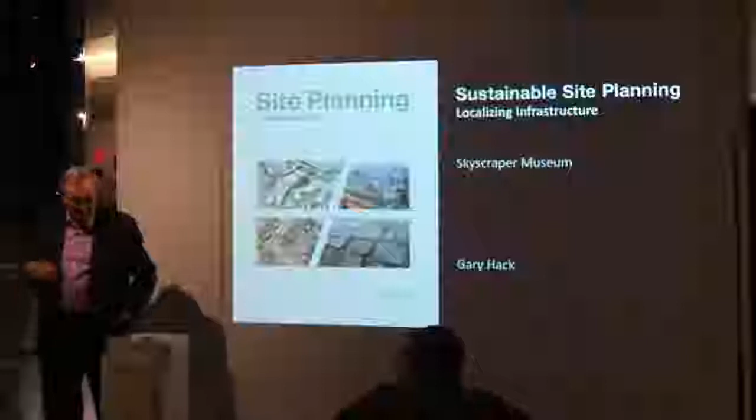I'm always partial to having a small group rather than a large group. I was thinking, as I was sitting there, that when I was a young faculty member at MIT once, I offered a new course scheduled in one of these raked classrooms with seats all up and down. I went there 10 minutes early and waited, and no students appeared. Five minutes after the scheduled time, a faculty colleague wandered in and said, 'My course is scheduled here as well.' So there were two of us, and no takers.

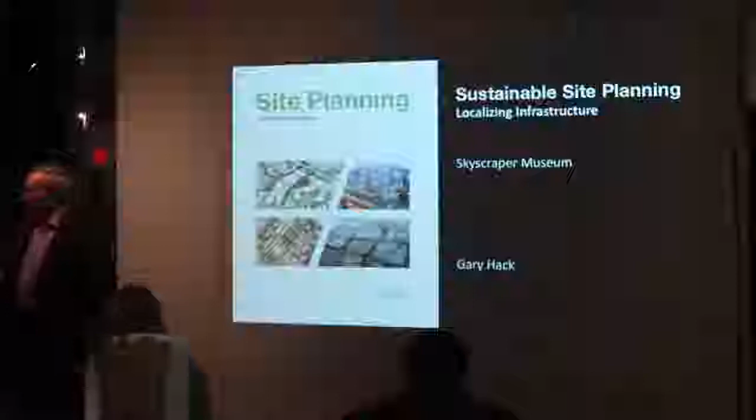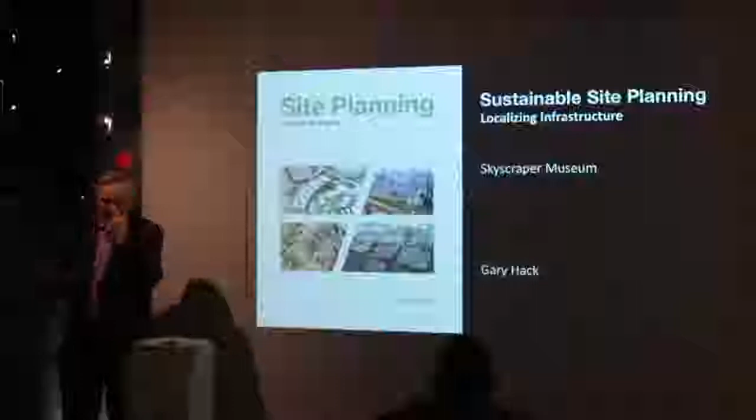In any case, it'll be good to have a discussion here tonight. I'm going to do it with the help of slides. I'm not going to try to summarize everything in the book—there's lots there—but what I want to do is focus on a particular subject I became very interested in while putting the book together. I'll say a bit about the book and its origins and how I thought about putting it together.

But the subject I'm going to come down on is the question of localizing infrastructure. What's happened in the world is that new technologies, new green technologies, have emerged that allow things that in the past relied on large public systems—like water systems, sewer systems, and other such things—to be done locally. That changes the whole ballgame, for development and for creating new kinds of opportunities. So I'm going to focus on that as the main topic.

But let me begin with a few things. The idea of writing textbooks about site planning goes way back, at least a century ago—these were the first textbooks done on site planning. Charles Mulford Robinson, the first professor of civic design in the United States at the University of Illinois, wrote a book called The Width and Arrangement of Streets, A Study in Planning, in which he cataloged what it took to plan streets. Longstreth Thompson did the first book called Site Planning in Practice in 1923.

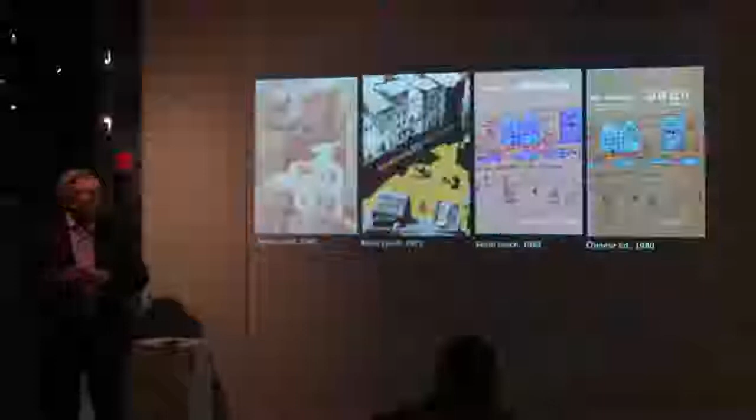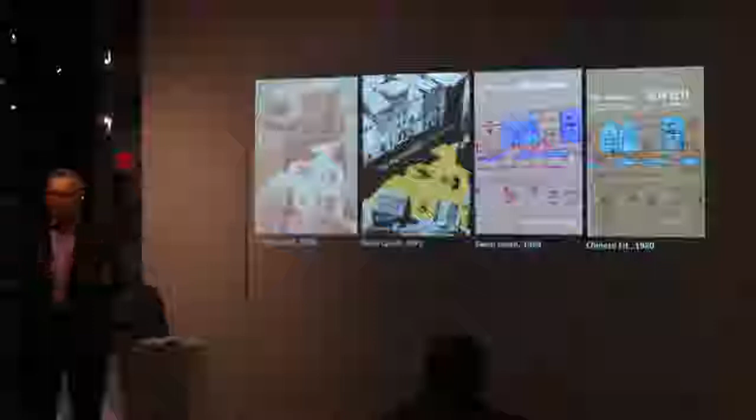My late colleague Kevin Lynch wrote a version of site planning, pulling together notes from his teaching, notes from engineer friends who helped on engineering aspects, and ideas from Hideo Sasaki, a landscape architect teaching a similar course. He published the first book we now think of as site planning in 1960, with a new edition in '71. In 1984, I joined him and we did an expanded, rewritten edition. That book has been in print and used to this day.

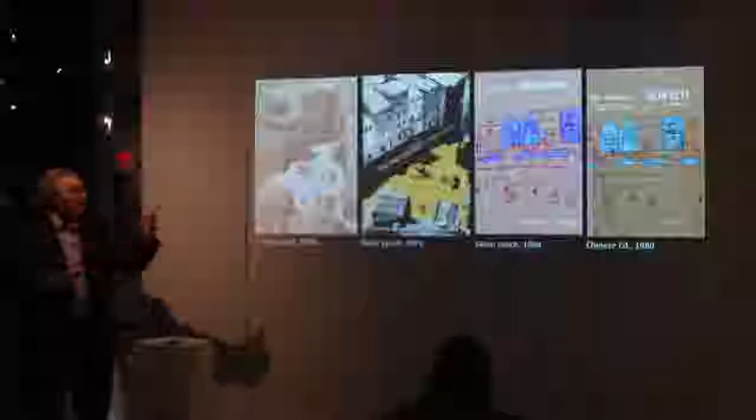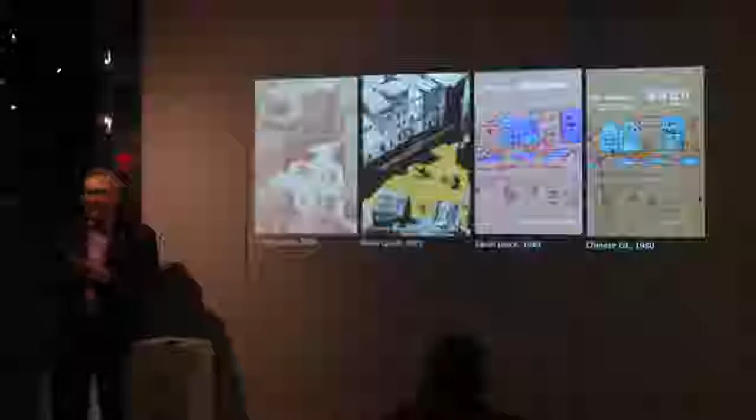It's way out of date—I wouldn't use it myself—but people do, and it's still going. On the right is a Chinese edition of the book. There are actually six Chinese editions, at least that I've counted—two were authorized, four were not. Whenever I go to China, somebody brings up one of these books and asks me to sign it, and I'm always curious which edition they're actually using.

So I begin with the premise that cities are built site by site. Planning is really important—I'm a planner, I've spent quite a bit of my life doing that—but actually the real decisions are made site by site in the city. Sometimes they're very large sites in which you create a context for individual buildings, but often they're small sites. The opportunities realized are as much a product of how creatively people approach individual sites as of any plans or grand schemes that local government or others have created.

So what makes for a great site? It's sustainable to start with. It's efficient—I'll talk a bit about what I mean by that. It's responsive to humans. It's economic—sites are there principally as instruments to make money for the people who own them, or to deploy resources well, as in the case of institutions, so they're not wasting money on things they could otherwise be more economical about.

Good sites are compatible with their surroundings, and good sites are adaptable over time. In fact, it seems to me that one of the important responsibilities of a person doing site planning is to think about what the next generation of use of that site will be, and to structure it in ways that allow a transition to new uses 5, 10, 20, 25 years afterwards.

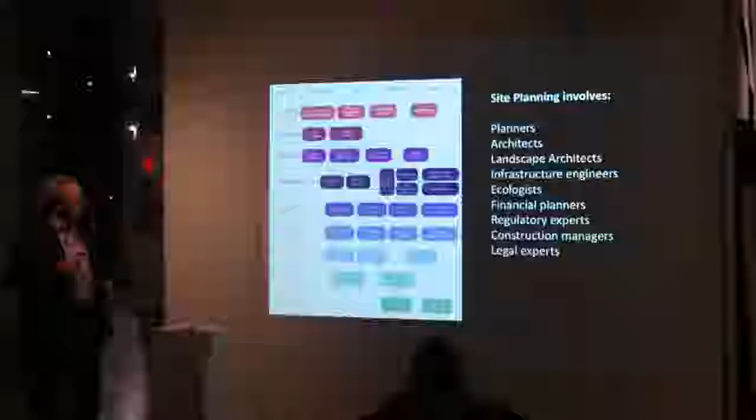Now, there are a lot of activities. Some of these are familiar to you in your various professional roles, ranging from site analysis to programming to site design to engineering, landscape architecture, landscape design, financial planning, etc. Remarkably, this is a field that is not occupied by one profession. It's occupied by several professions.

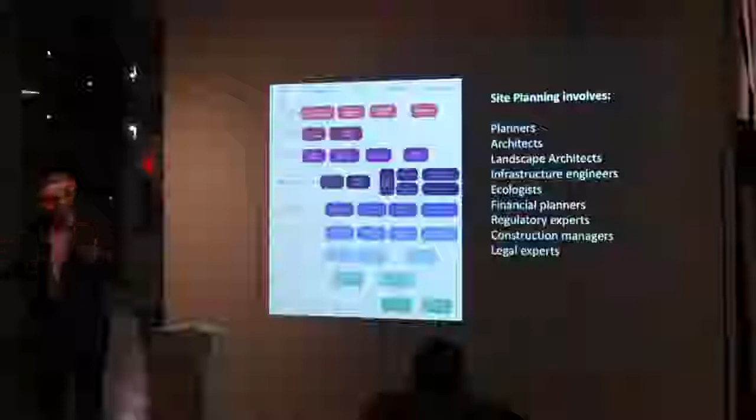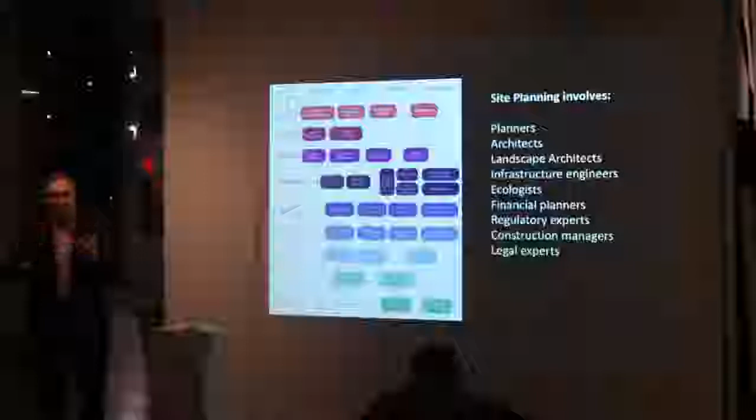The architecture exam for licensing architects has an examination on site planning. The landscape architecture exam has a whole section of its examination on site planning. The planning exam, which I helped write, partly because I pushed this, has a whole section on site planning as part of that kind of stuff. So this is really a shared endeavor of a number of professions, and it has to be thought of as one where professions pool their skills, resources, and knowledge in order to make decent decisions about how a site should be developed.

In organizing the book, I decided to do something quite different from what I had done before. What I realized was that things change very quickly in some fields and not at all in others. In the past, we had written fairly long chapters, and when things became obsolete, you had to rewrite the whole book. I think 10 or 15 years from now, most publications are going to be digital, and in fact there are 2 digital editions of this already available now.

With digital editions, it allows you to actually revise pieces of it whenever you want. Three years from now, when new developments occur in a particular field, you can rewrite that chapter. So what I have in the book is 40 chapters, each of which is a discrete subject, and each of which is the state of knowledge today, intended to be updated as knowledge evolves in these fields.

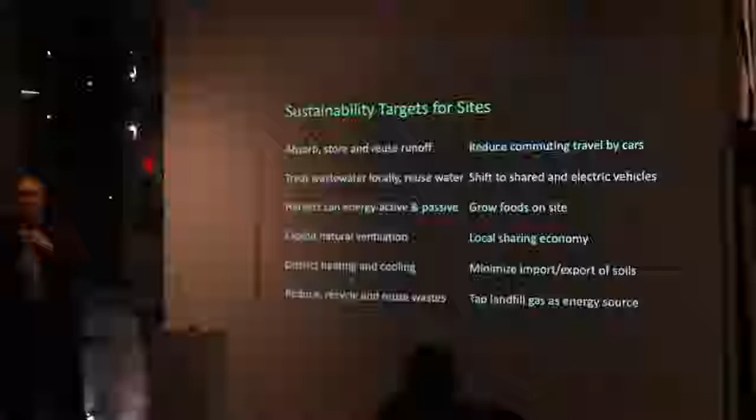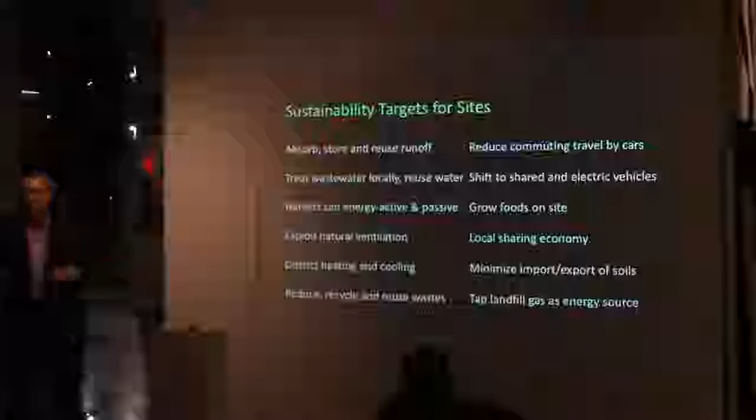So what do I mean by sustainability? I'm going to focus on that. In terms of sites, these are the kinds of things that are usually included in the business of making sustainable sites: absorbing and reusing runoff, reducing commuting travel by cars, treating wastewater locally, reusing water, shifting to shared and electric vehicles, etc. You see the list across here. There are many more things to be done, but if one can optimize all of these kinds of things on a site, then in fact the result is a much more sustainable site.

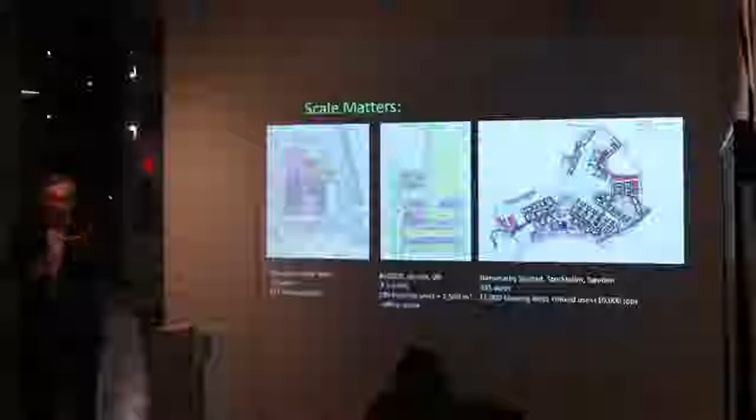Scale also matters, and what you can do depends a lot on the scale of the land that you're dealing with. I told Carol that she deals with skyscrapers and I deal with ground scrapers, both literally and figuratively. When you're scraping a lot of ground, you have many potentials that you can bring into play. When you're scraping very little ground, then you're dealing with vertical infrastructure on it.

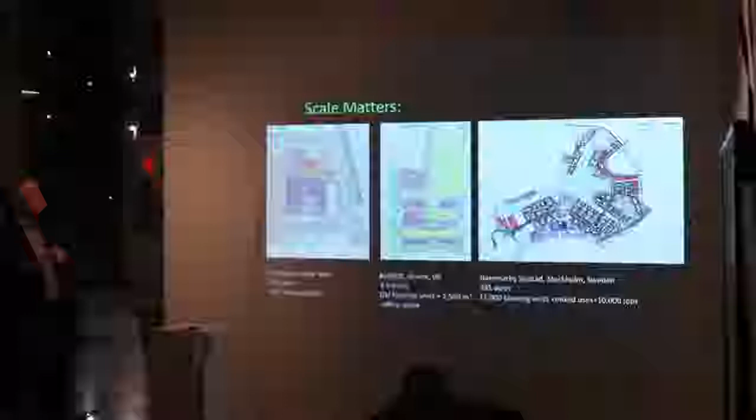So here are 3 examples. The first is a block from here, the Visionaire site. It's 7/10 of an acre in size. It has 250 housing units, and on the ground floor has the maintenance facilities for Battery Park City Parks. It has a supermarket, lobbies, and a few other kinds of things on the ground floor.

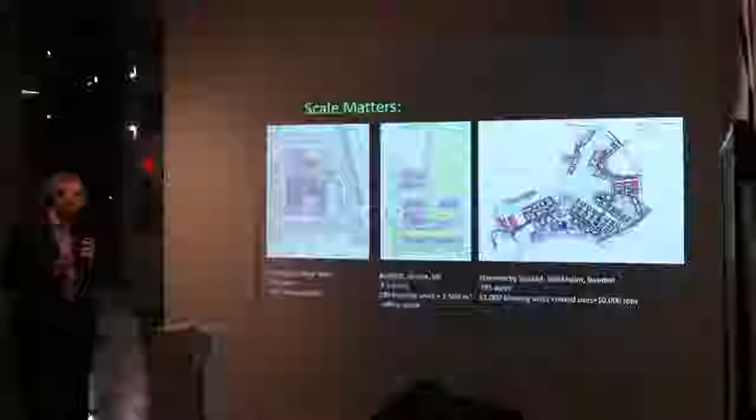Second example is a place called BedZED, which is in Sutton, just outside of London. It's a very innovative housing project on 3.5 acres, 100 housing units plus 2,500 square meters of workspace. It's a live-work community that's been created. Now that's something you can do at that scale when you have enough room to spread out and do it.

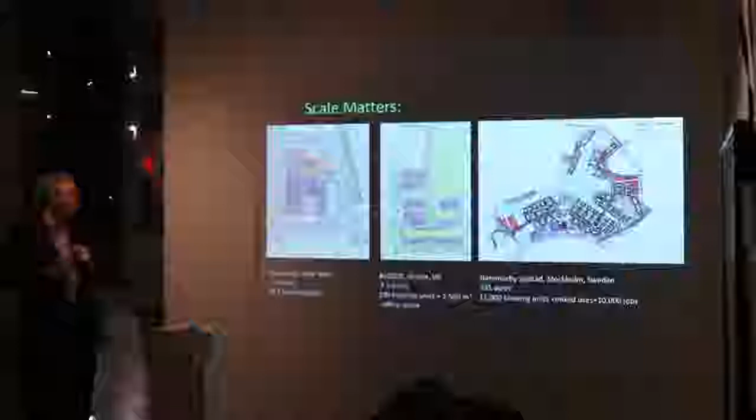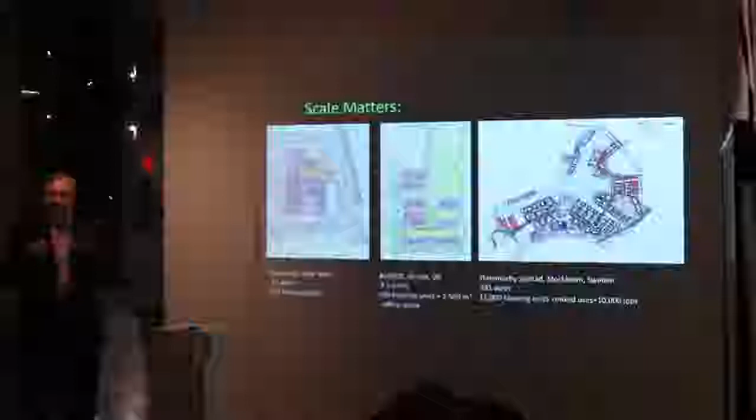The third is a much larger development, in Stockholm, Sweden, Hammarby Sjöstad. I think the best new community development in the world. It's been done over the last 10 or 15 years, planned by the city of Stockholm, developed by many design architects and designers. It has about 11,000 housing units and over 10,000 jobs, all integrated within that development.

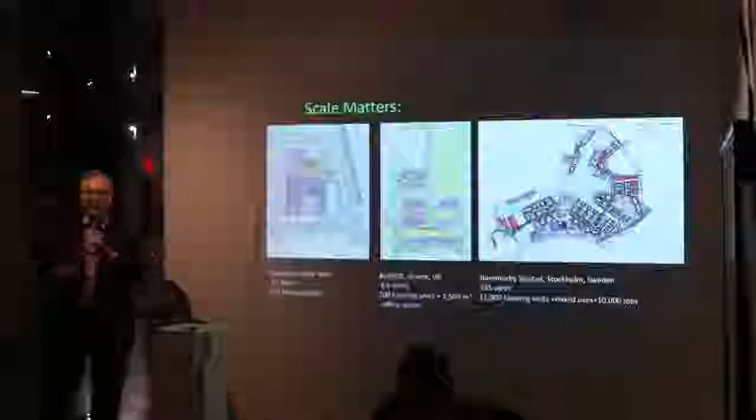Let me say a little bit about each of these. In the Visionaire project, this was a real push on the part of the developers and architects who did this project. Not only did they do things like harvesting sunlight and creating energy from it, but one of the really innovative things is they actually created a sewage treatment plant right on site. So that piece actually functions within that vertical infrastructure they have. Water from toilets and all the other domestic uses goes into it.

It's treated, the sludge is taken and hauled to the sewage treatment plant. The water is either recycled for gray water in the building or treated again in order to make it good enough for potable uses, although they haven't been using it that way.

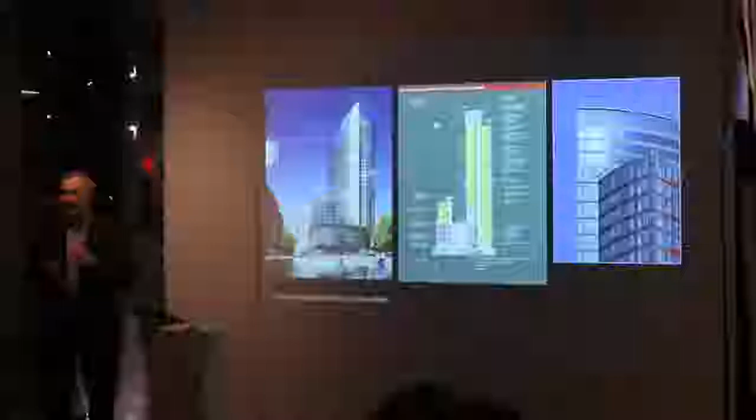They don't advertise it when they're renting the building. But there's an interesting case here: a localizing of some infrastructure that would otherwise have occurred at the scale of a piece of the city, or at least large public systems would be the way you went about that.

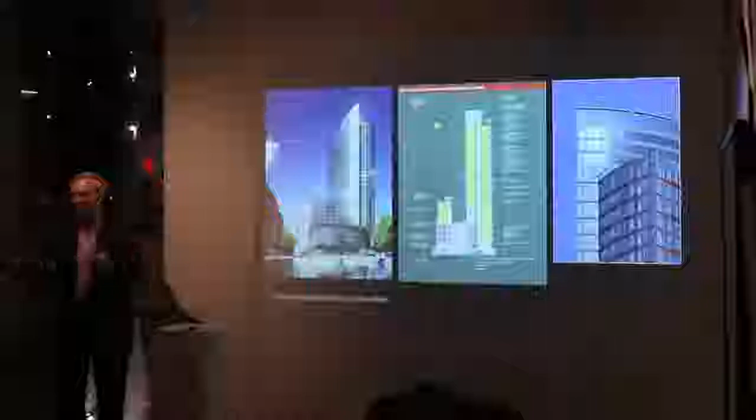It also captures and stores all rainwater on site, uses it for irrigation of their rooftop garden and elsewhere. One dilemma that poses, which is interesting to me, is that they're paying for the city sewers at the same time they're localizing that job in the building. There's been a long dispute about whether they should get credit for not using those public systems. What's clear is that when you begin to localize, you have to think about how you give people adequate credit for the investments they're making in these elements.

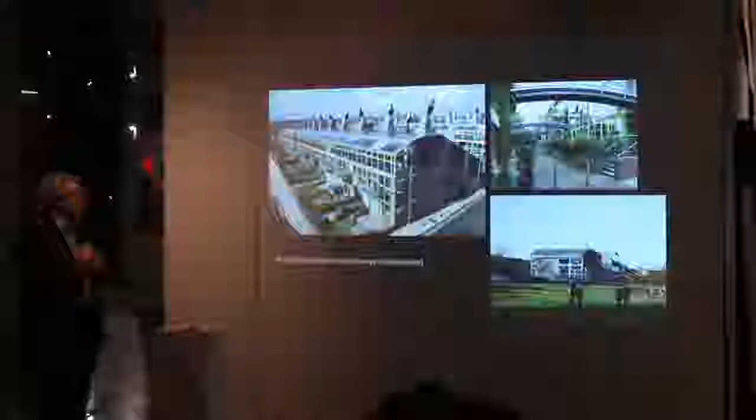Here is the BedZED project, a kind of remarkable project. It looks crazy when you see it, but its major objective was to have zero net energy used in this project. That is to say, they are not adding to external energy requirements, nor putting any additional carbon into the atmosphere as a result of the development. So how do they do it?

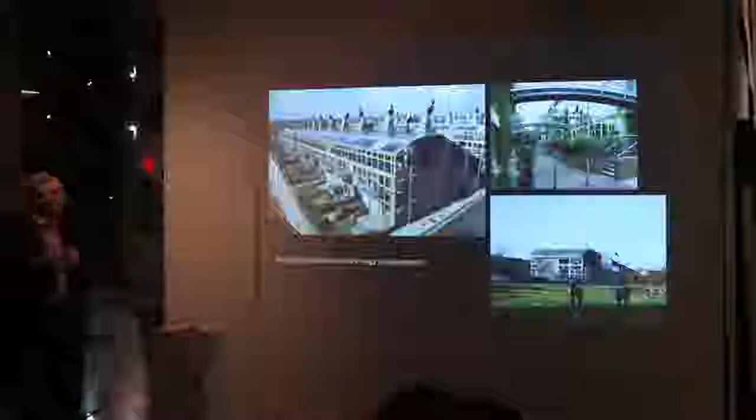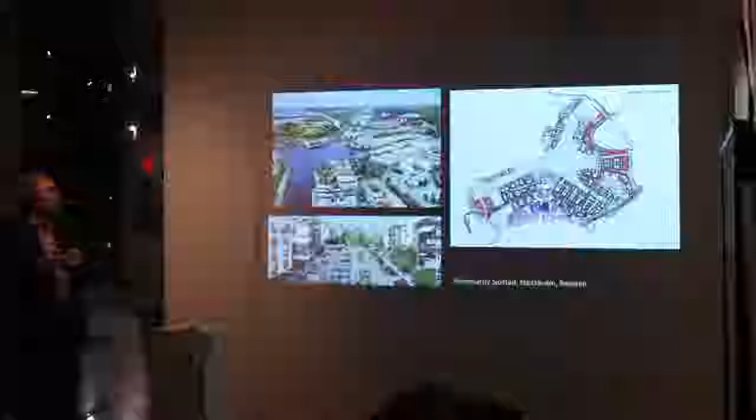Well, one way is that they orient the building so that they get passive sunlight for a good deal of the heating demand. They have solar panels used to generate electricity, mainly for charging the electric cars, which are the only vehicles allowed on the site.

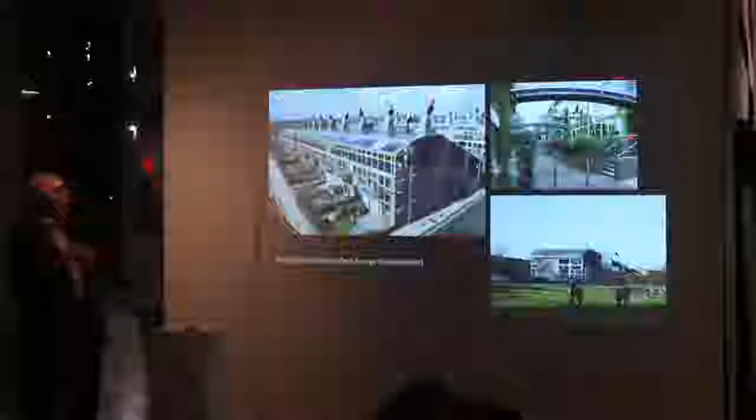They have a live-work arrangement where buildings, behind this one for example, there's a work building connected directly to the apartments and houses on the other side. Out of the 100 housing units, there are 50 live-work spaces, so up to half the units can actually live and work in the same place. They also created a micro-utility, which is this piece here.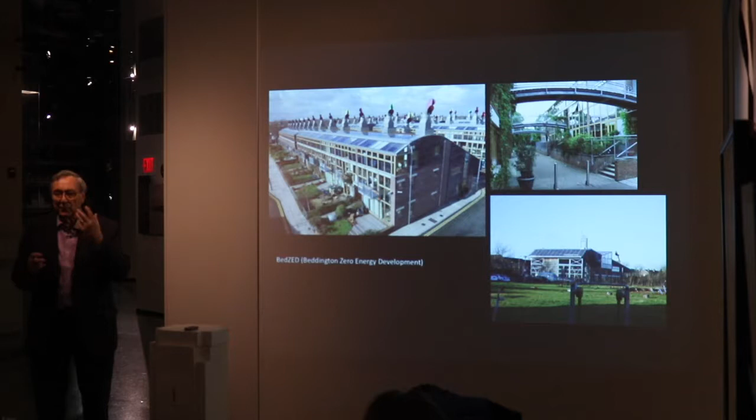The micro-utility creates all the heating for the site—they don't have cooling—and in the course of doing that, generates electricity as well through a wood chip burning system. They use wood from a wood lot purchased nearby, cut the wood, bring it in, burn it, and it's a renewable source since the wood lot constantly builds new energy. They also use solar panels and other ways to supplement that energy.

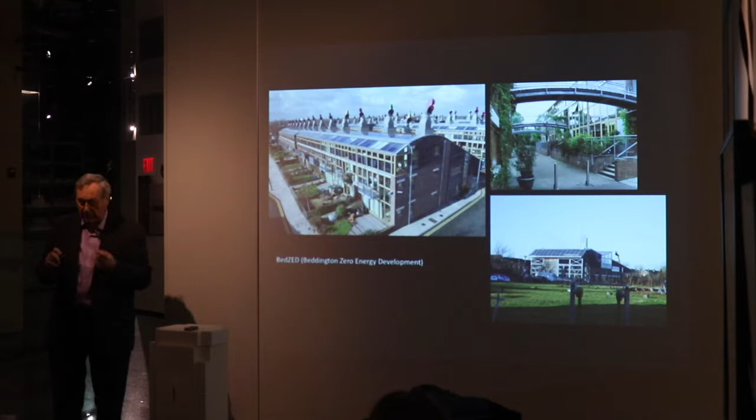At that scale you can talk about micro-utilities, which can in fact serve more than one area. I won't go through these systems in detail, but they're carefully worked out. They also treat all the sewage and reuse all of it as greywater—these are some of the treatment facilities they use, and they have larger ones as well. As I said, electric cars and so on, and this is the system they use for generating the electricity.

Now, at a much larger scale, such as Hammarby, you can do a lot more. This is a kind of wonderful development—you can see the form of it. It's mostly low-rise units, a complete mixed-use development with all the institutions and commercial uses that are needed.

It was built at the same time that a light rail system was connected to take people to the mass transit system in Stockholm, so people could avoid actually buying or using a car. They have wonderful mass transit throughout this thing.

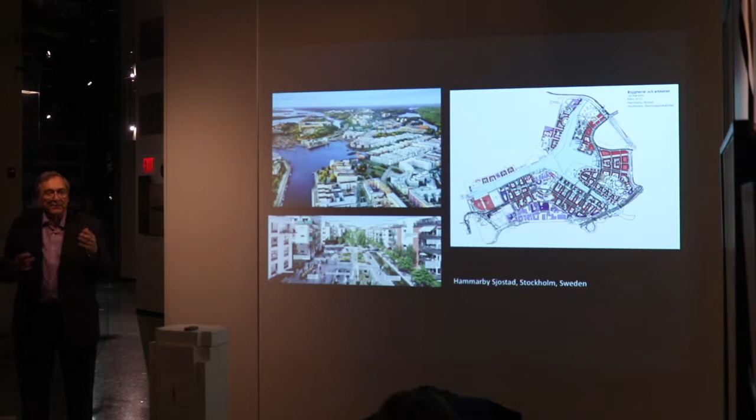They treat all runoff on the site. They have, and I'll show in a moment, a vacuum garbage collection system and recycle all the materials they collect through it. So now we have something that begins to resemble a kind of independent operating entity that doesn't need ties to the big systems, except transit ultimately, and a few other things like that.

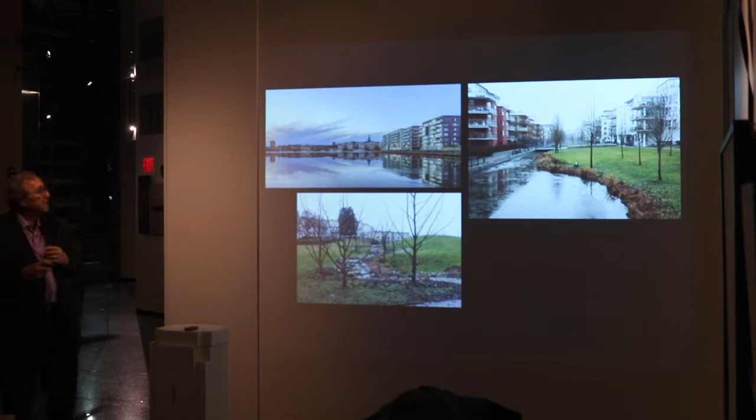All of the runoff, as you can see here, is treated and reused. This was a brownfield site, and there were a number of, they harvest methane gas from the brownfield, using it for fueling the district heating system on the site. The idea they have is of closed loops: three kinds—one on energy, one on water, and one on waste.

In each case, every piece of material that arrives in a building gets recycled, reused, and advantages the development in terms of either energy it's creating, sales of those items, or other kinds of things. Similarly with water, similarly with the energy sector.

Their mass transit is the main way that one gets around. There isn't really a need to have a car. Wonderfully innovative transit stations which have buses as well as light rail vehicles going through them.

These are two dimensions of the vacuum garbage system. Roosevelt Island has a vacuum garbage system which was done in 1975. It was one of the earliest ones in the world, and is now kind of obsolete.

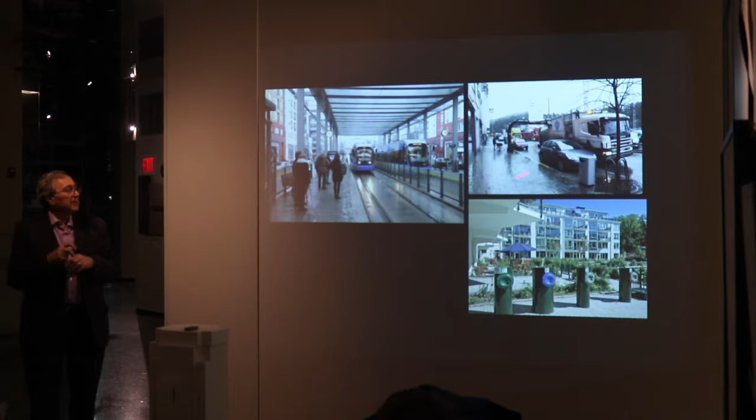What these do is they allow you to segregate the uses at the source, and then either by suction, pulling them out of areas in the ground where things are stored, or through direct suction from the individual buildings, take it to the transfer station, at which point these things are separated. Some become energy, some become compost, some become recyclable products.

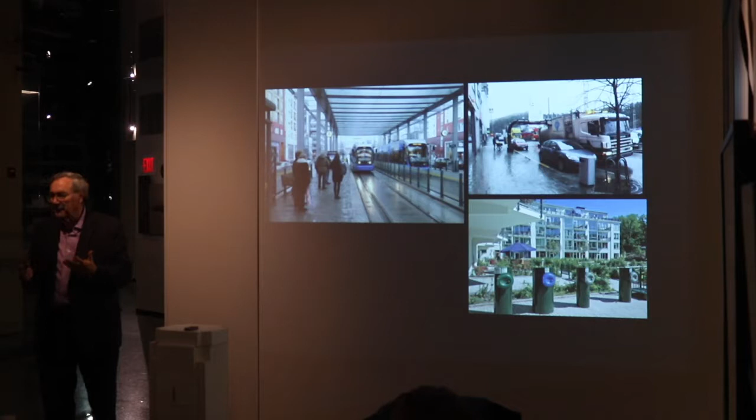And in fact, it's interesting. I looked for American examples of this, and there is no example in the United States that's begun to try to press infrastructure to this extent and try to be as innovative as they have been there.

So let's look at some smaller examples of interesting infrastructure, localized infrastructure. This happens to be in Vancouver, British Columbia. It's a curious little building that sits underneath an expressway.

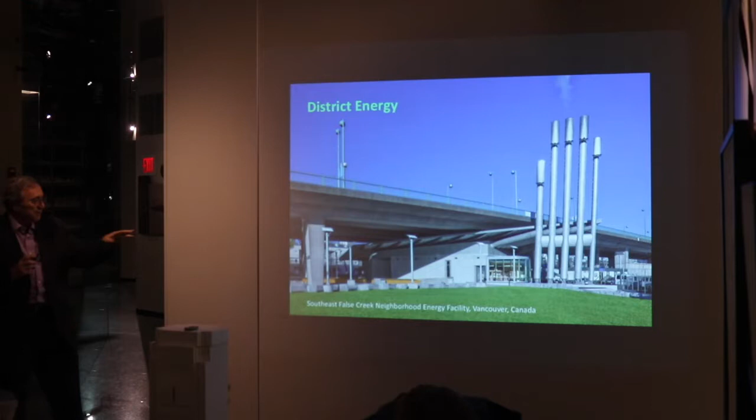It's a district heating plant that's been built for the Southeast False Creek area, which began as part of it, began as the Olympic Village. And so this provides all of the heat and cooling that's necessary for several thousand apartment buildings now, plus other kinds of uses.

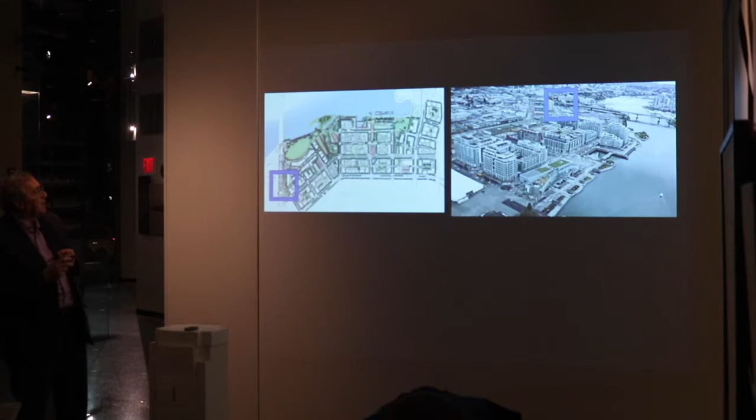So how do they do it? Well, first of all, it's located, as you can see, at the edge of the development. This is a sketch of or an aerial of some of that housing in the area. This is the area that it serves. It's a pretty large area.

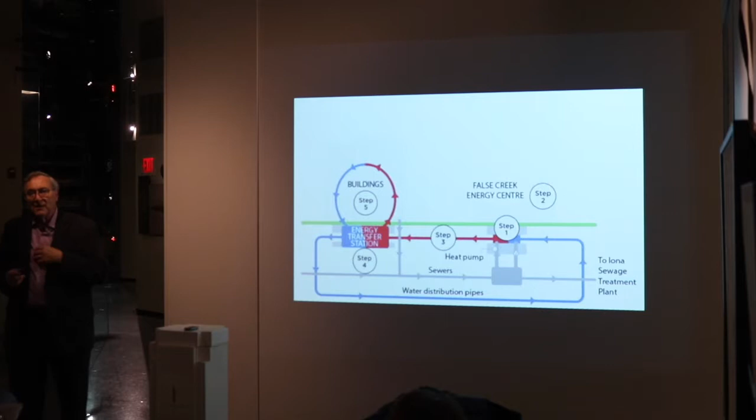So how do they do it? What they do is they harvest the heat from the sewer system. With heat pumps, they harvest the temperature differential in the sewage system from the outdoor temperature. So when you go and have a shower, somebody has paid energy to heat that water up to something tolerable to you, it goes down the drain and disappears forever, all that energy.

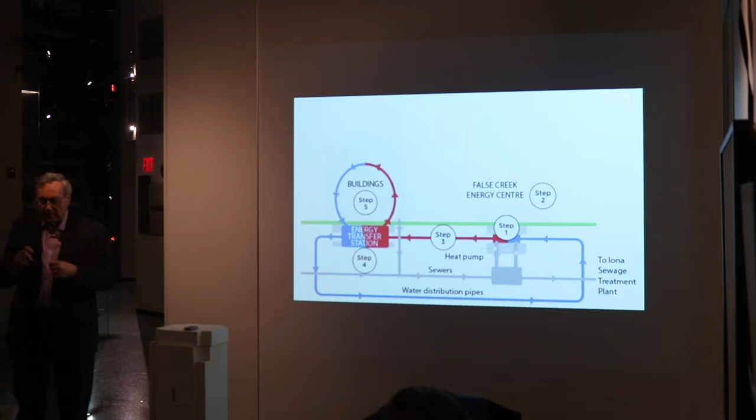So what they're doing is actually taking the 70 degree or 72 degree water and absorbing the energy that's in it in order to heat the buildings, and they pipe it back into the buildings, or in order to cool the buildings in the summer. Literally, the entire heating demand is picked up by this. They do have a backup natural gas system because they're not sure if they're going to be able to do it completely. But in fact, it seems to me this is a localization of a really important little system.

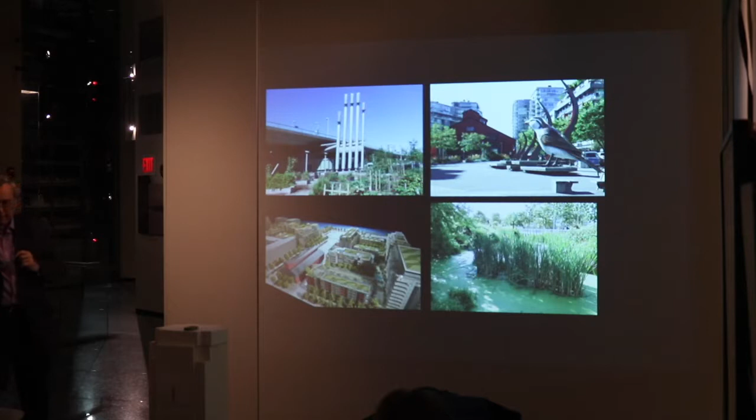There it sits, and there's the housing that's there. This is, of course, when you don't need mechanical penthouses on buildings, then you can really use the roofs for active uses, and they have done so there. And they've also treated all of their storm runoff in natural areas that are on the site. This one happened to have an extraordinary amount of algae in it when I was there, so this is not trivial in terms of how you manage these kinds of natural systems.

Second example, this is a wonderful example from the Netherlands. This is a development which has about 600 housing units in it, which was planned by a group of people, many of whom were at the Technical University of Delft. They decided what they wanted to do is create a sustainable community, and they planned it. Many of them moved in and lived there, and a number of others joined in, and it's continuing to expand, so it got much larger.

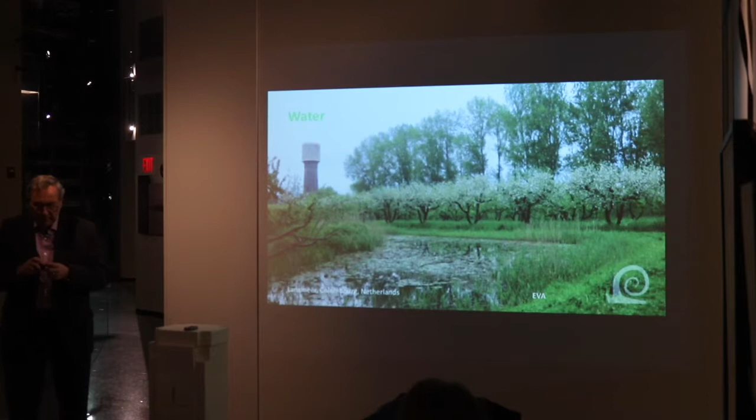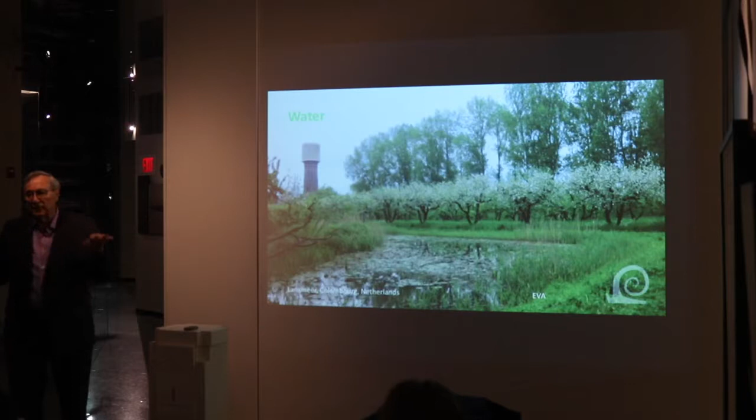So the site for this was a curious site. It was the city's water tank and all of the wells that provided drinking water for the city. So what they did was they decided to keep all that in place and to use that for heating, much as they did in the Vancouver example that I showed you, and also to make water the kind of central theme of their community.

So this is the layout of it. It's wonderful, it's called Lanxmeer. It's a couple of railway stations from Utrecht, and the houses range from clusters.

Clusters like these, each with its own distinctive character, in which people manage the common space collectively. No cars are allowed in the development. You park your car out at the edge and walk from there. The railway station is over here, so if you're living here, you can walk as easily to the railway station and take it to other places.

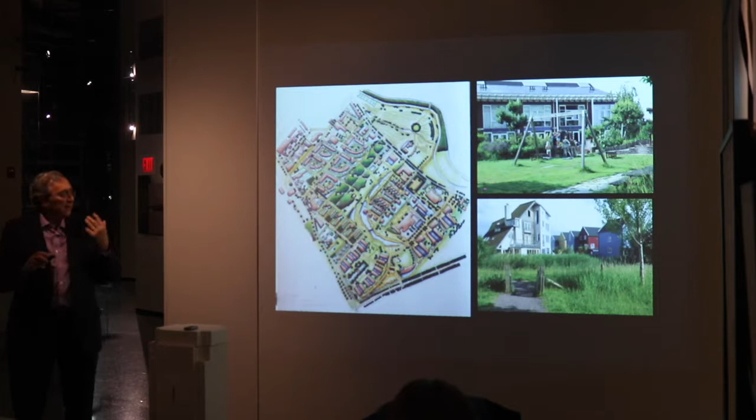There are also lots of wonderfully curious individual houses, and this happens to be a Montessori school they've created. But the whole thing that draws it together is essentially water, and that water begins with harvesting rainwater, storing it in cisterns, using it, then discharging it into wetlands areas.

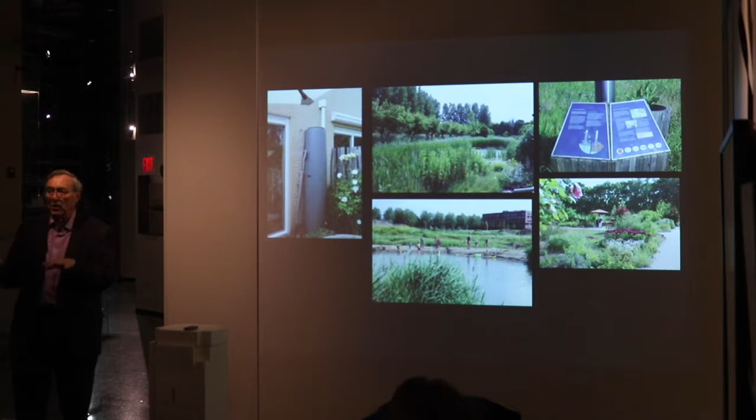Wetlands that are also used to irrigate orchards and grow food as part of the community. Ultimately, it's actually improved to drinking water quality, and this little beach they've created is that same water that came from both the sewage of the community and the runoff going through it.

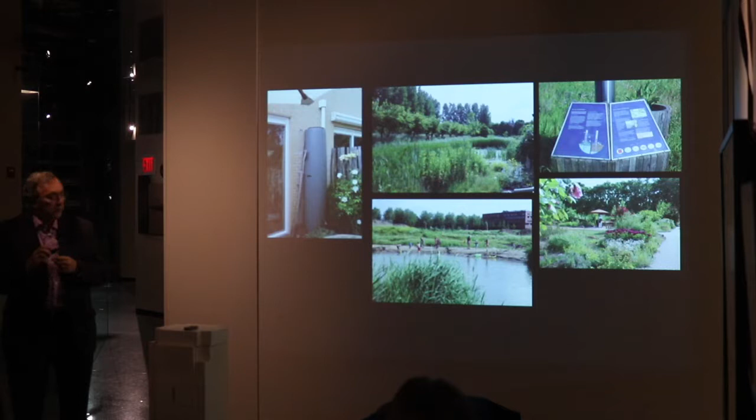Here's a third example. This one actually surprised me quite a lot. There is a project in Portland, Oregon called Hassalo on 8th, and it consists of a 4-block area in which they treat all the sewage out on the street.

You might think examples like the Dutch one I showed are only applicable to low-density areas. Well, this is a pretty high-density area. These are the 4 blocks that it's treated. The street in between, you can see, is this one, and all of the water...

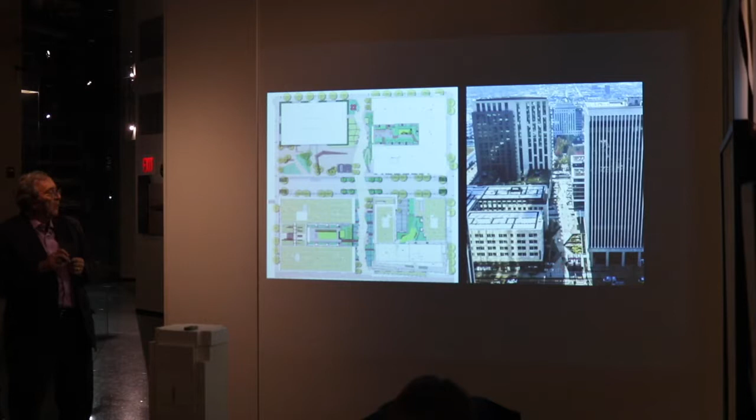A couple of them are residential sites, a couple are office sites. All of the water is treated both by flowing through a series of treatment cells out in the open, and also through purification devices, including some filtration devices over here.

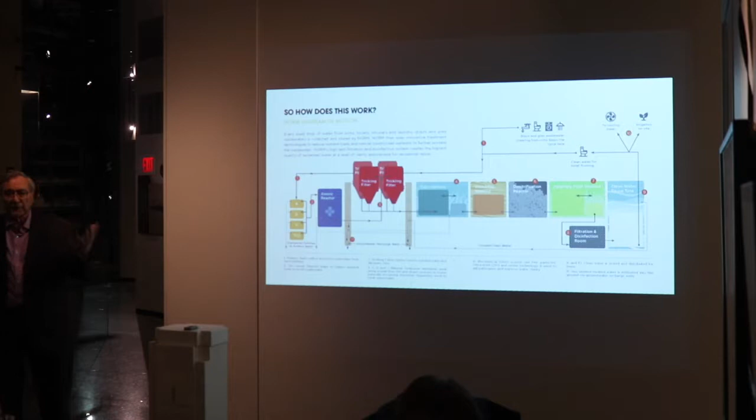So how does that work? I won't go into detail, but basically you have to filter water to get the big impurities out, take the sludge and dispose of it in other ways. Then there's a series of cells in the street that the water moves through, at the end of which it's disinfected and good quality enough to use for irrigating that area, for gray water, toilets, and other uses within the buildings—all in a dense urban environment.

There are also going to be many more local mobility systems: cars you can rent by the hour to move around urban areas, or go from a transit station to a more remote place, or if you're carrying something. Scooters, motorized scooters, already taking over the streets in Baltimore and other places. There are bicycles too—not only ones moored to rental stands, but free bicycles you can leave anywhere, and cars you can rent and leave anywhere.

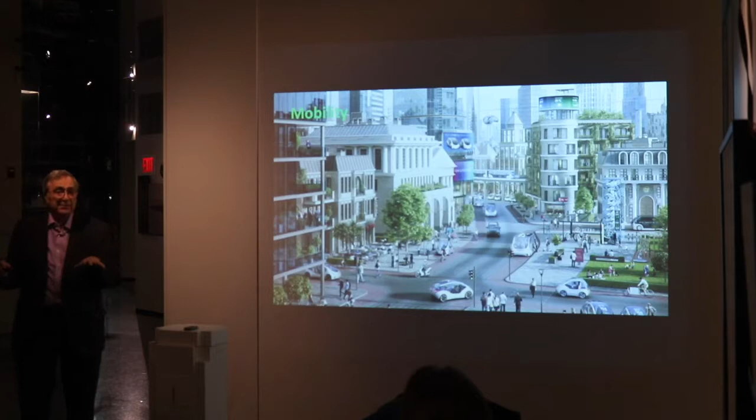All of this suggests there's a kind of local planning that needs to get done around mobility. I say local because when you look at the distribution of trips in most cities, most trips are local—short, from one nearby place to another. Solving that kind of mobility problem is going to become a major driver.

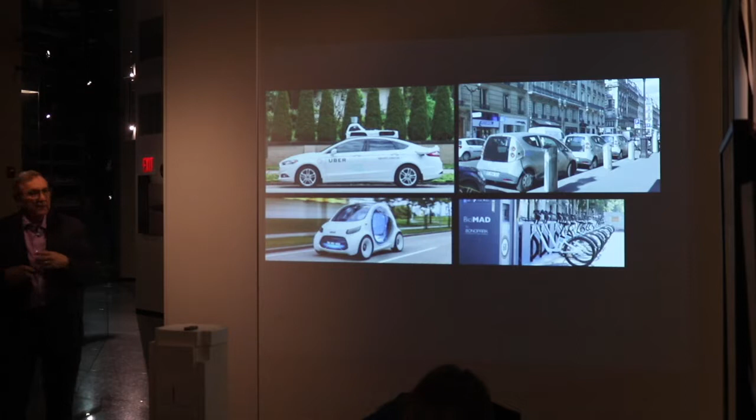So what do we have? We have all of these kinds of things in Paris already—electric rental cars. It seems clear that a large fraction of the population doesn't want to buy automobiles, they want to rent them, use them when needed. Mobility on demand, as in the case of Uber. But all of these things as well, and I don't think we're prepared for this in terms of our streets and the way people use our urban areas.

A few people have done some thinking about this, and the downside is that we could actually be overwhelmed by the number of vehicles crowding their way onto city streets with no discernible order for them. This will also have a big impact on parking.

My colleague at MIT, Carlo Ratti, thinks that you could reduce a minimum of 30% of the number of parking spaces in cities, and probably up to as much as 70%, depending on what the break is in terms of people renting and sharing vehicles versus buying their own vehicles.

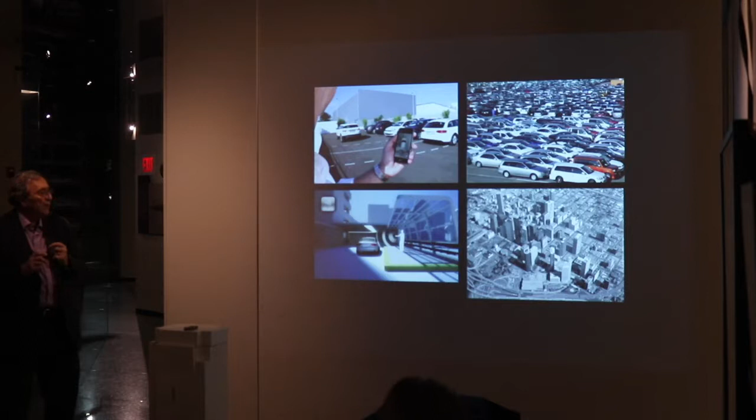But under any circumstance, you're not going to have to park your car in the future. You're going to drive to the entrance of the garage, and it'll self-park, and it'll come on call afterwards. And so other cities have already begun to respond in various ways. This wonderful parking garage in Miami Beach serves as an event space when it's not used for parking.

Terrific idea. Vertical parking systems like the one in the middle. And it also means that when we think about parking and that piece of infrastructure in a city, we have to think differently, because sloped parking garages don't work. What you want is big parking areas where you can pack many cars in, and they'll automatically shuffle themselves to get out of that garage.

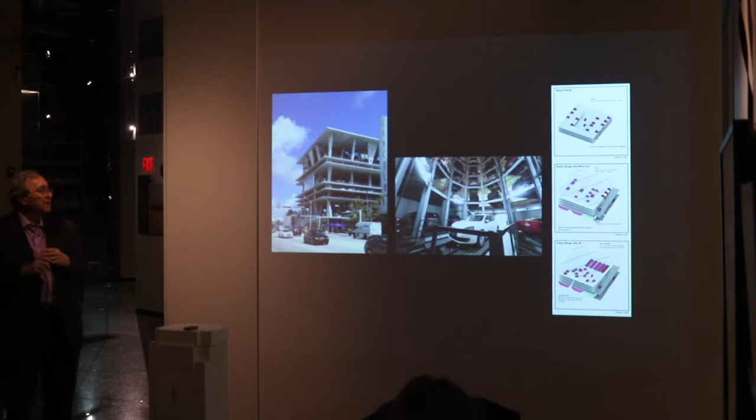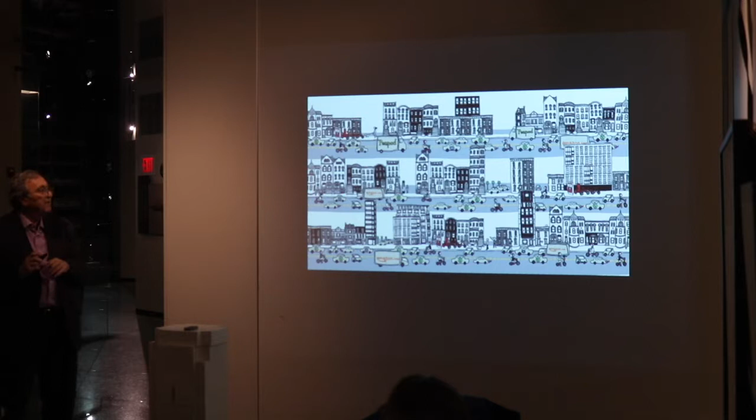So then the other big elephant in the room, especially here in New York today, is Amazon and the entire shift of what's happening to the retail sector. And of course, it's everything, anytime, right away. And that has meant and will mean continuing crowding of the streets with vehicles that are devoted to delivering those things.

We need to deliver them. We need to make logistics spaces where things can be shifted from big vehicles to small vehicles. Ultimately, drones will have to be accommodated. And so where do we put the stuff when it arrives?

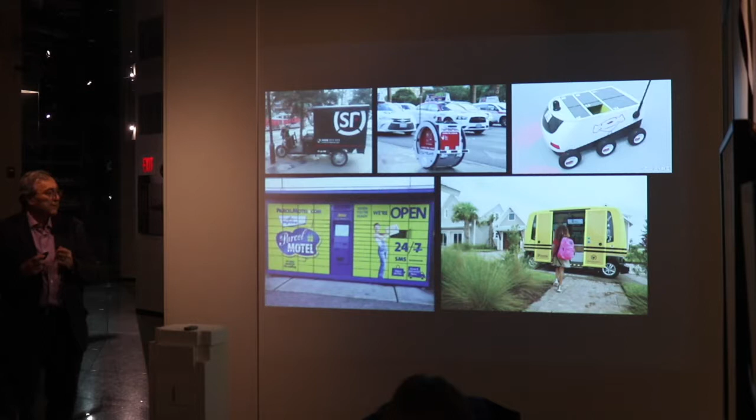There are places now creating parcel motels where you can have your stuff delivered and pick it up later. There will be automated delivery vehicles arriving at front doors and waiting there for people to pick up those parcels or whatever they're receiving. Another demand on the curb.

Now, Bjarke Ingels did a very nice little study a few years ago that's not widely known. It's a study that said, how would you change streets if you understand all of these autonomous vehicles and other kinds of things are going to be using the streets, and that they're going to have the capacity to avoid collisions, avoid pedestrians, and other such things.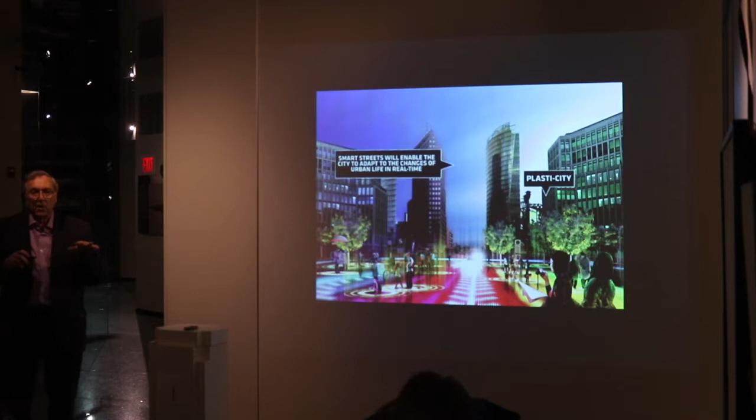His argument was that we should now begin to think of streets not as channels, as we have for so many years, but as a plastic space that's capable of being changed constantly. No curbs. The entire front to front of streets being thought of as a place where all of these activities can occur and can be scheduled at different times of the day and the night.

And he even argued that in Potsdamer Platz in Berlin, in the evenings when there's less traffic than in the daytime, you could hold a concert in the center of that Potsdamer Platz, and people could wander across and ride their bicycle over there. Cars would avoid them and find ways around and through that maze.

Well, that may be a bridge too far. The reality is that, in fact, we're going to have to rethink our streets, because with all of the new vehicles and all of the new uses, the allocations that we've had in the past are not going to be appropriate.

In addition, a substantial amount of street space is going to be freed up. It's going to be made available for other kinds of uses, and streets are going to look differently, as you see on the right hand side.

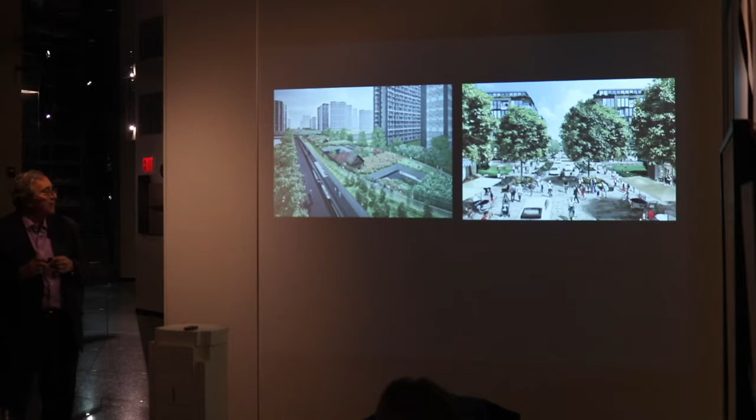We also may have the capacity, as the numbers increase of things like bicycles and their use increases for longer distances, to begin thinking about the creation of bicycle freeways and other kinds of things which segregate those uses from the more local kinds of uses that are occurring on the street level.

Finally, I want to conclude with a little bit about the underground. In the past, in doing site planning, here's what we thought about.

Where do you place the sewer lines, the electric lines, et cetera, within the street right-of-way to protect them and make them available for repair.

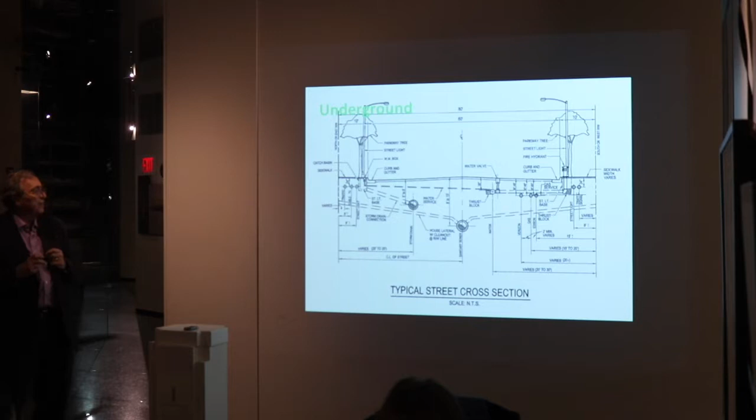What you have to do is disrupt all of the other uses on the street. It occurred to me as I was putting this together that thinking about the organization of the underground is going to be a really critical piece of the new infrastructure we need in cities.

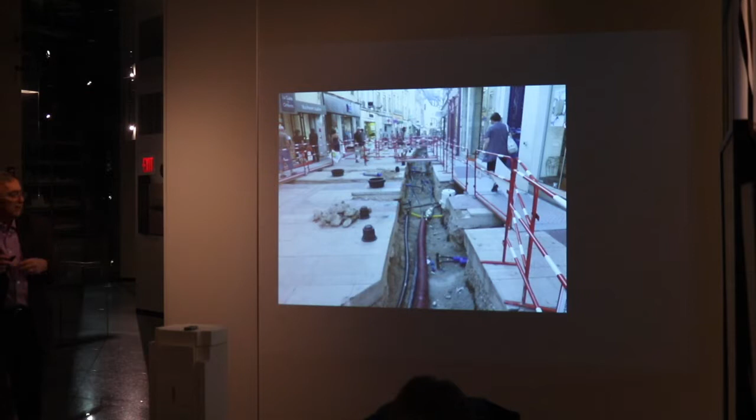Instead of tearing up the street periodically for new cables and fiber optics and other things, many places, particularly large institutions, are building underground utility corridors—an underground street system that lets them service many utilities without disrupting life on the street.

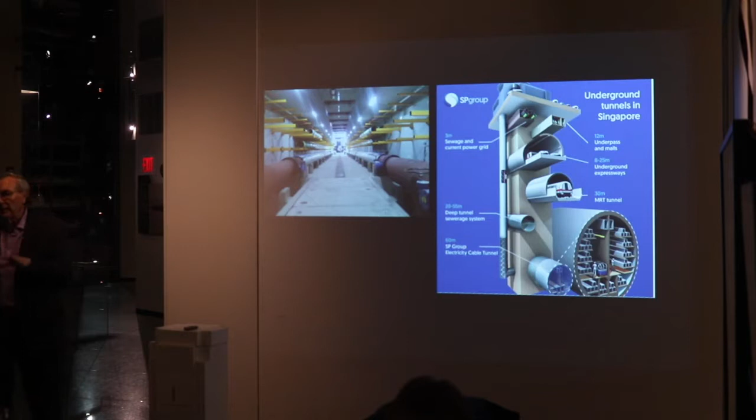Beginning to rationalize this is going to be an important piece of what we do. And it was interesting to me that...

In the first several decades of the last century, Chicago had an underground railway. That underground railway was intended and used to deliver materials to all the manufacturing buildings above, to take coal and other fuels needed to heat the city, the Loop. It operated for 30 or 40 years.

Here you see the tunnels. Tunnels still exist. In fact, a few years ago, when they had big flooding in Chicago, those tunnels flooded, and that was a really serious issue.

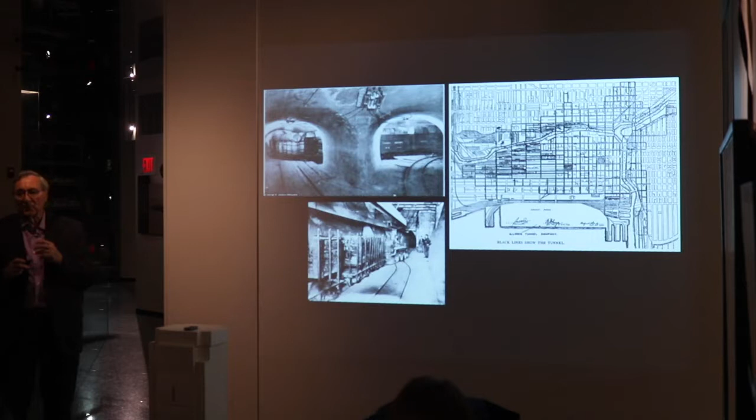It was abandoned in the 1930s and 1940s when trucks became the major mode for delivering stuff to buildings, and people didn't want to break their bulk into other kinds of uses.

But new cities like Masdar in the United Arab Emirates, in Abu Dhabi, are actually creating whole levels devoted to infrastructure. I think these days it's kind of irresponsible not to build modern infrastructure into a very large, high-density development.

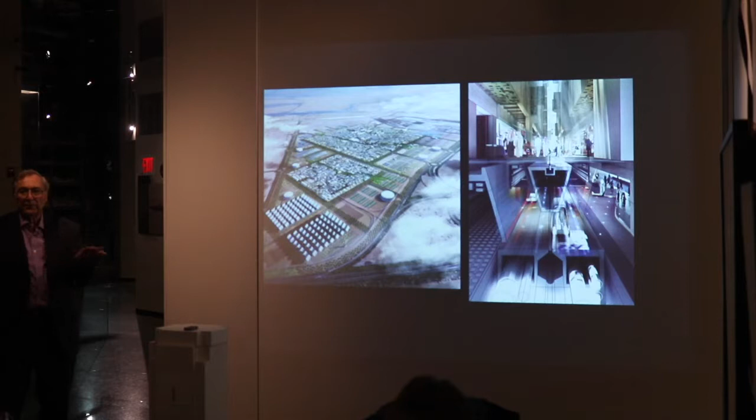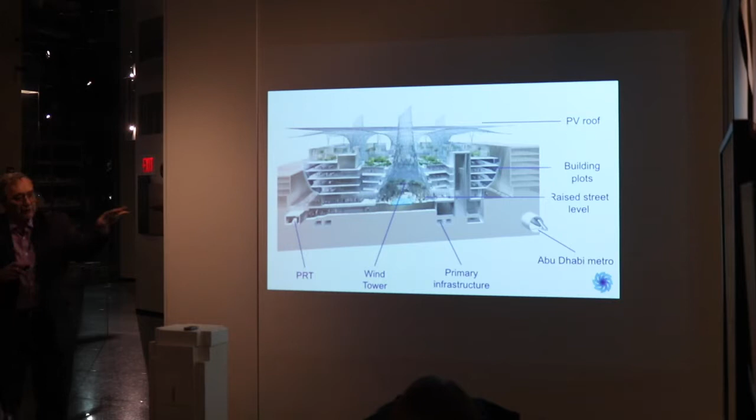You can see here the various places allocated within that underground level for other uses, including local circulation, which occurs in that underground level, as it does here. And these are in place. These are working. These are not pies in the sky.

Finally, I think this is the final illustration. Norman Foster has done some work with Elon Musk on his system of tubes. This is a far more ambitious infrastructure idea.

But the argument they are making is: why do we unload stuff in a port, then put it on a truck, take it to a warehouse, take it out of the warehouse, and take it to the final destination, or something resembling a final destination? Why do we have all these steps?

Musk has argued that one could develop a set of pressure-free tubes which could easily move containers of various kinds from the port directly to the destination.

So what you see here is the port landing, loading, these tubes traveling to the city, arriving, being unloaded, and then taken directly into their destination.

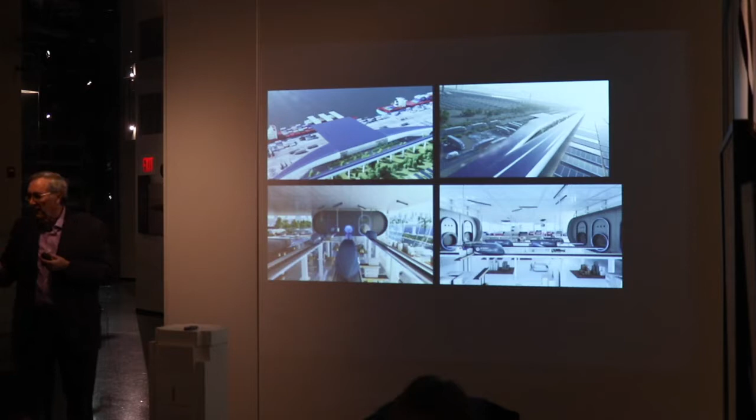When we were working on the World Trade Center, it occurred to me that it was sort of silly to imagine you'd take trucks throughout this entire complex down below ground and spend the amount of money they did for security checks and other things right there.

It seemed much more viable to create a processing facility somewhere nearby and then put things in containers and take them into individual buildings and up the elevators into individual floors.

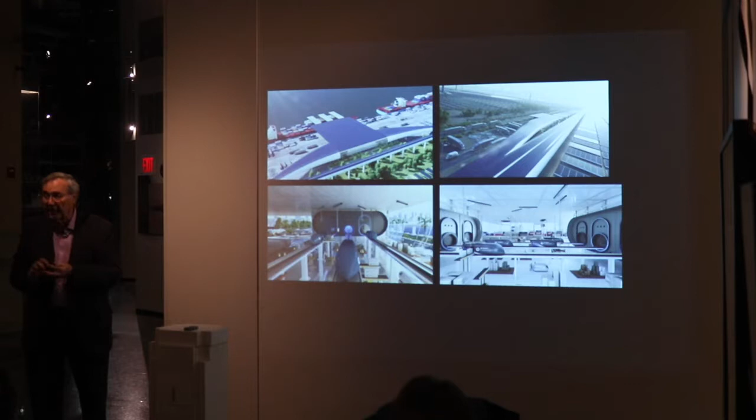That's how we work airports—we don't bring the trucks out onto the landing areas. That's how we do other kinds of mass infrastructure. I think the business of materials handling is going to become an important piece in the future.

So I end with this slide, and I do it for a couple of reasons. First of all, localizing infrastructure doesn't solve other kinds of problems.

It doesn't solve the problem of flooding, which happened after Hurricane Sandy in all of lower Manhattan. But Battery Park City has energy, except our building, which is dark because the transformers were down there with salt water. Most of the development, though, is actually above flood level, and it continued to function because of the localized infrastructure in place. So I'd say what if they had another infrastructure system here, and another one over here, and another one over there, built toward less dependence on large public systems and the disruption caused by major catastrophes like the hurricane.

Let me stop there. Your thoughts, your comments, your contributions to this. I know some of you have done large-scale developments and are doing them, and it would be great to hear your thoughts on this.

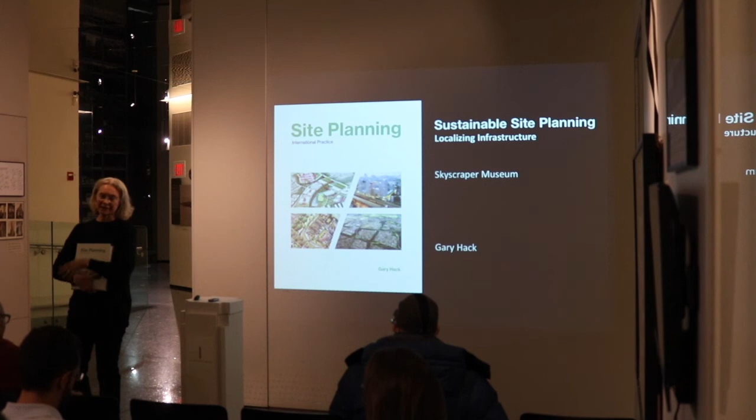It turned out, as we were thinking about how to reorganize the south wall of our gallery, which needs to be refreshed, that we'll tell the story of the redevelopment of Ground Zero and the rebuilding of the World Trade Center site.

I had not realized, until I looked at the photo credits, that Gary was on the team of the master planning with Studio Libeskind, who won the competition for the site development. So just taking that small local area of Lower Manhattan, Gary has put his hand and his brain on so many different parts, but he's also worked around the world.

As you mentioned, teaching at both MIT and the University of Pennsylvania—at MIT he headed the Department of Urban Studies and Planning, and at Penn he was the Dean of the School of Design. He's been lots of places around the world in addition to the US, and has taught at universities, most recently in China and many other places in Asia.

And around the world, in the last few years, he's been part of a Coursera course on urban design and the history of cities—a broad title—which with colleagues from the University of Pennsylvania has about 70,000 subscribers and counting.

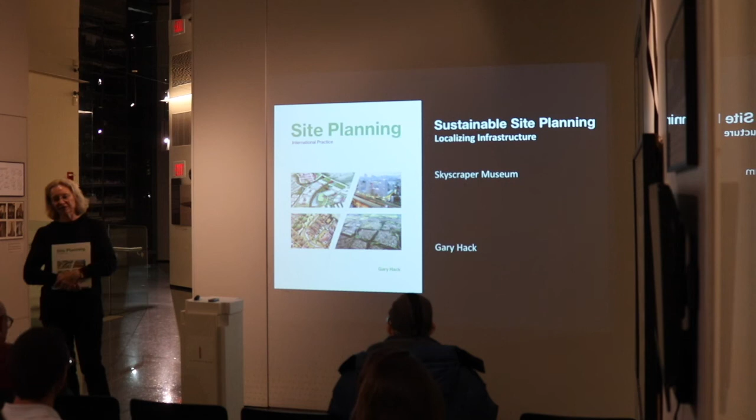So it's a great pleasure to introduce Gary Hack to this intimate situation for this evening, where he'll give a talk about how site planning has been, not invented, but re-presented, I suppose, as sustainable site planning, which is the talk for tonight. And then we'll have the opportunity to ask questions and have a conversation after.